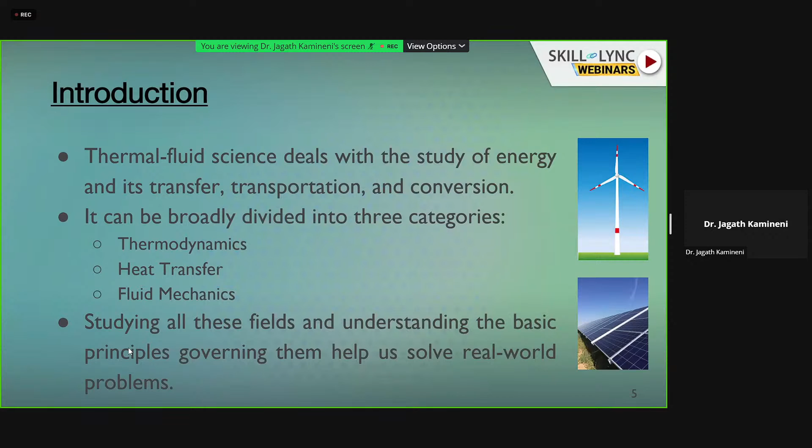So moving further, this thermal fluid science is actually built up with these substreams, which we call fluid mechanics, thermodynamics, and heat transfer. So without taking much time, let me split and introduce one by one.

Thermodynamics is when we study the science of energy, and it converts to work or heat, or vice versa. Things like IC engines, phase changes of fluids, and so on, these are not limited, it's a lot more. Coming to heat transfer, where we study the transfer of energy, not the conversion of energy, in both materials and fluids.

Think about processes like convection and conduction, and a practical example is heat transfer from a flame into some water in a pot in order to boil it. This is a simple example to understand how energy is transferred, not converted. We'll talk in much more detail in the slides.

When it comes to fluid mechanics, we study the mechanics of fluids, both in motion and at rest. If the fluid is in motion, we call it dynamics of the fluid, and if at rest, statics of the fluid. Whatever the category or subcategory, we study how this functions, and in detail it includes linear and non-linear behavior to understand fluid behavior. As an example, think of buoyant forces on an object in water, such as an iceberg.

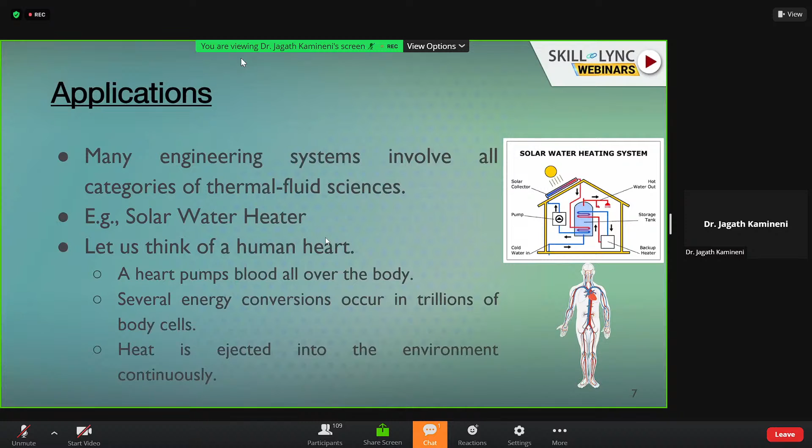So if you understand these kinds of principles, you can study the problems and get the solutions, or the precautions that need to be taken to avoid these kinds of problems. This is where we study fluid flow, the dynamic nature of the flow, and the effects of viscosity also. We may get a chance to learn about the pumping system. So this is a kind of application we can think of.

Moving on to other applications. Another good example is designing the radiator of a car, which involves determining the amount of energy from knowledge of the properties of the coolant using thermodynamics. Then the determination of the size and shape of the inner tubes, the flow of the fluid, and the outer fins depends on heat transfer. The size and shape of the inner tubes and outer fins will be designed based on heat transfer concepts.

And the determination of the size and type of water pump to be used will be decided by the basic principles of fluid mechanics, the concepts applied to find out what size and type of water pump needs to be incorporated in this particular application. So of course,

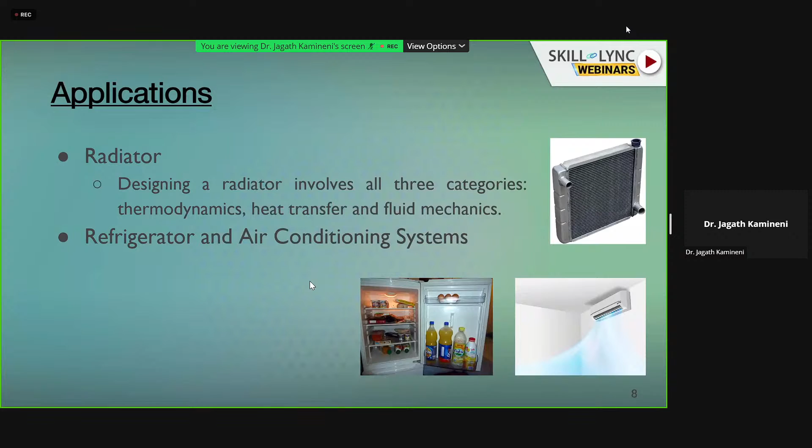Another such application is thermal management of electronics. Maybe we'll talk about this because it is an emerging area where we can use thermal fluid sciences rapidly, in batteries, laptops, and so on. Maybe we'll talk about that also in the research areas, where researchers and scientists are trying to invent new principles or approaches for how to utilize thermal fluid sciences in particular fields.

And another application, such kind of applications, you can just explore the science beyond the Earth's atmosphere. So you can think of the study of fire and combustion in, let's say, a gravity-free environment, which eliminates the confounding factors of buoyancy and flows, allowing us to better understand the underlying physics of fire dynamics. In such systems, with these thermal fluid sciences, you can also see how to analyze material flammability or fire safety on Earth. All these things will also be a very good area of research.

So there is research in other areas of fire science, such as conduction and explosion of fires in both larger areas and confined areas. So there are opportunities such as the development of state-of-the-art combustion models or mesh-free simulation techniques. These are some of the numerical techniques which can be used to solve real-time problems, where you can think of applying these principles to get energy efficient systems or buildings. So this is the motto of understanding these thermal fluid sciences.

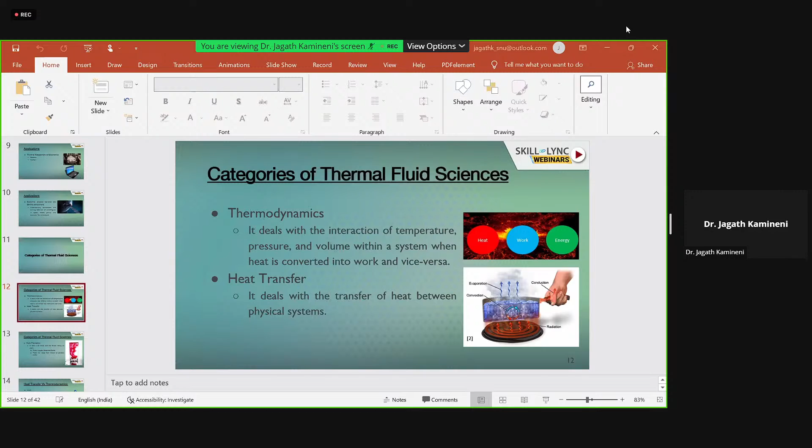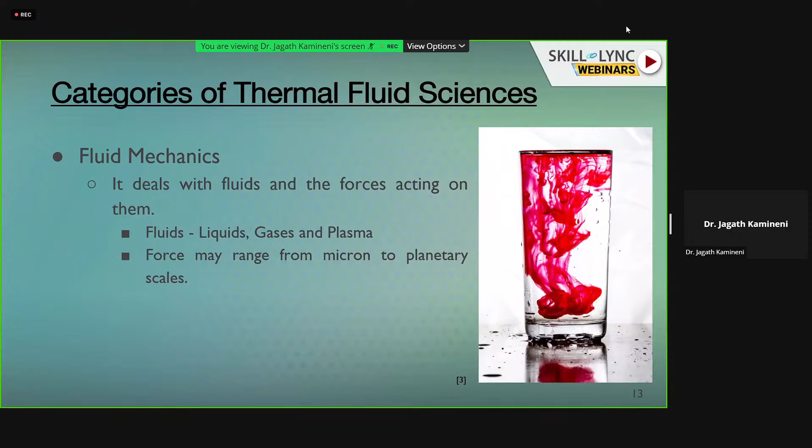Advances in computational science also evolved rapidly and have facilitated effective implementation of numerical methods in this particular field, in modern disciplines such as CFD, computational fluid dynamics. So these are the subcategories of thermal fluid sciences. Moving on, why is this so different from heat transfer and thermodynamics?

So we'll take one definition, and we don't have much time. I think it's only because of so many distractions.

It's okay. Anyways, I'll quickly go through some of the basic definitions which you might have already learned in the past. I'll not take much time, but I'll trigger some consciousness on these concepts. Let me start with the definition of heat. It is a form of energy that can be transferred from one system to the other system due to temperature differences. Everyone knows this definition. It's not new, but it helps to understand both thermodynamics and heat transfer.

If you look in depth, thermodynamics is about how much heat is transferred, how much work is done, and what the final state of the system is. Whereas heat transfer tells us how heat is transferred. It is not telling us how much heat is transferred, but how heat is transferred and at what rate heat is transferred, and also the temperature distributions inside the system. That is the difference you can make out from the basic definitions.

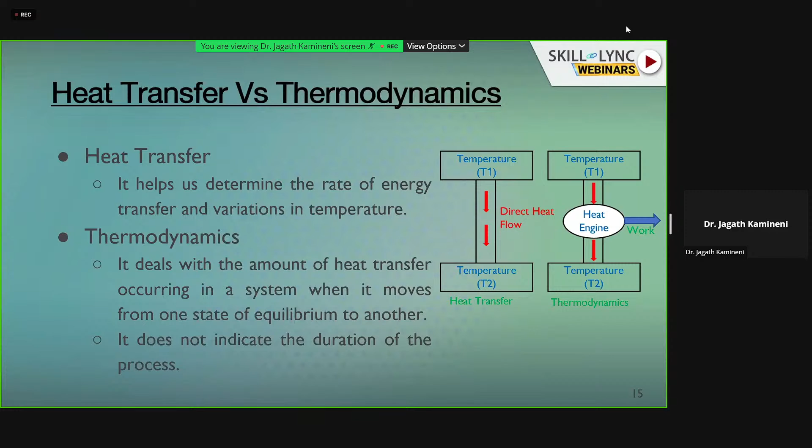In engineering problems, we are often interested in the rate of heat transfer, which is the topic of the science of heat transfer. So that is the kind of study you can think of, and this is the difference we already discussed. Then let's look at basic definitions. Energy is the ability to cause a change. Energy can be converted from one form to the other form, as we already discussed. However, the total energy remains constant. That is the rule: energy can neither be created nor destroyed. That is the basic idea.

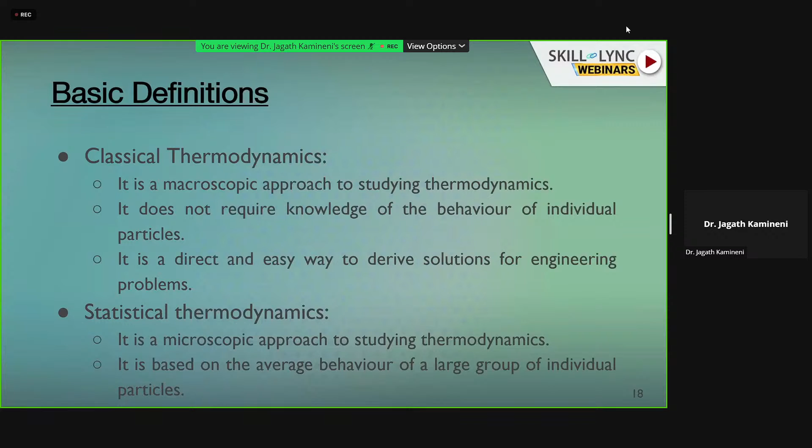So there are different kinds of thermodynamics. These are basic definitions. Classical thermodynamics, where we see only a macroscopic approach, and statistical thermodynamics, where we see a microscopic approach. Maybe we'll see some of the laws, where we understand what kind of thermodynamic systems we use in a general sense.

So this zeroth law says if two systems are in thermal equilibrium with a third one, the two systems themselves are in thermal equilibrium. So that is the zeroth law. We'll just see it briefly.

And the first law deals with principles of conservation of energy. We already discussed it, right? With the first law, we may not expect these kinds of conversions. Complete conversions may not be possible, but you can deal with these kinds of principles. The internal energy of the system equals the difference between the heat transferred into the system and the work done by the system.

So let's assume one machine is continuously evolving some kind of heat. Just take the human body. That is the best example to illustrate the first law. What is the difference between the heat transferred into the system and the work done by the system? That is the quantity which says what the internal energy of the system is.

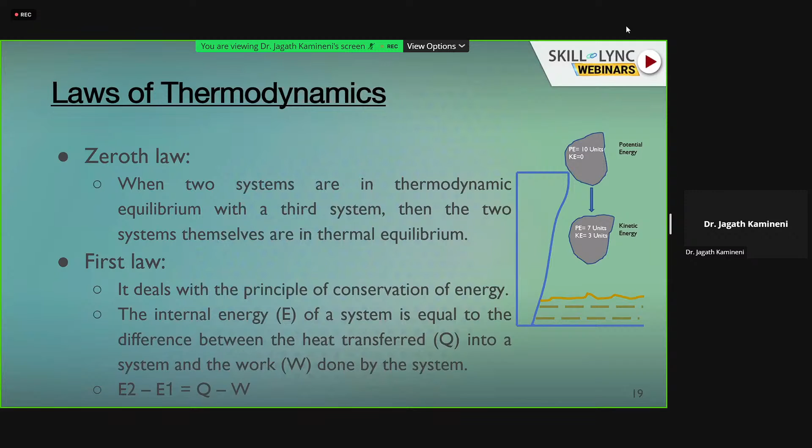And coming to the second law, the entropy of the entire universe will increase over time. So it will be a never-ending process.

And the third law says absolute zero temperature is unattainable, because you may not be able to maintain such systems, or you may not be able to create that kind of system in an equilibrium position to maintain it at zero temperature.

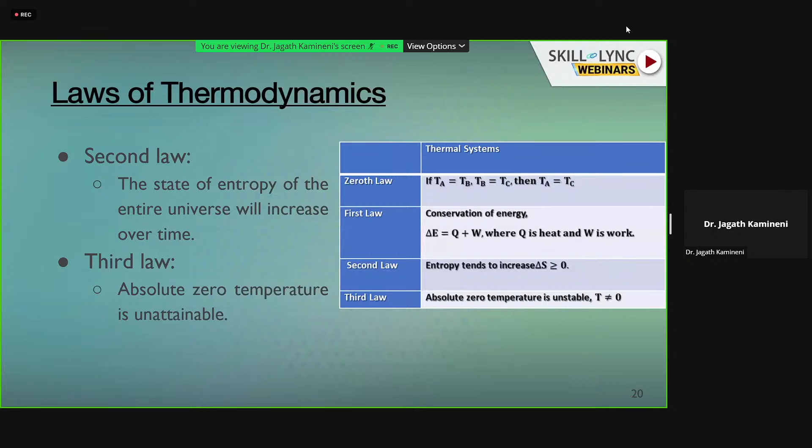That is not possible. So when it comes to problem solving techniques, you can imagine the analytical approach, experimental approach, and numerical approach. Any kind of engineering problem, whether it is a structural problem, a computational fluid dynamics problem, a heat transfer problem, a fluid flow problem, or a combination of all these, can be solved by the analytical, experimental, or numerical approach. These are the different approaches.

In the analytical approach, you have to establish an equation, whether it is a differential equation or whatever form. The physical system needs to be defined in a mathematical form. That mathematical equation needs to be solved by taking the inputs to give a solution. So you can think of that kind of system.

But in real life, not all problems are basic-level problems, and complex problems will not be solved by analytical expressions. Just think of a circle, x squared plus y squared equals r squared. You cannot solve a bigger problem, like an aerofoil problem, by boiling it down to a simple equation. The only approaches you can think of for complex problems are the experimental approach or the numerical approach.

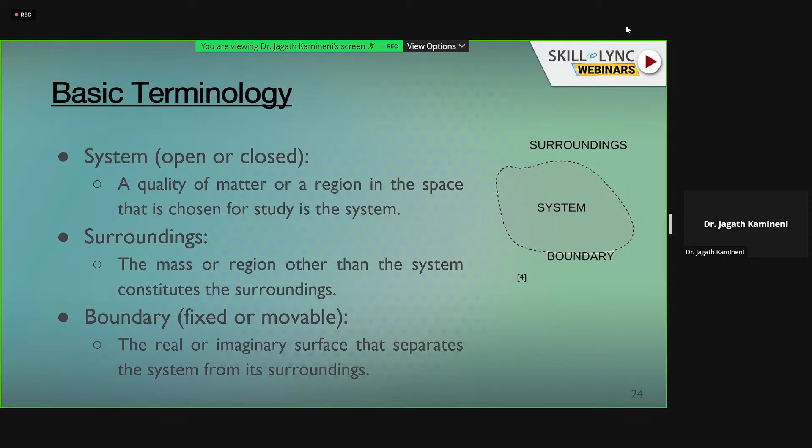And there are some basic terminologies, dimensions, units, where the physical quantity can be characterized and the magnitudes assigned to the dimensions, which are called units and dimensions. And these are the basic terminologies, open and closed systems. Maybe I'll just skip some of the content.

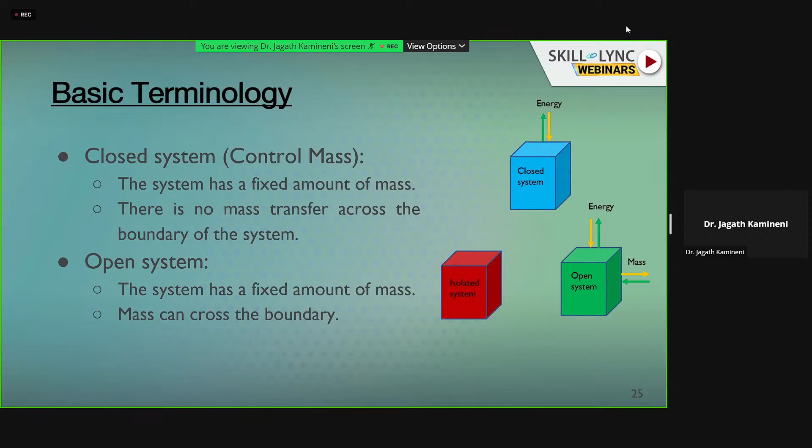Basic terminology, closed system, open system, where I'll just explain only one point about closed and open systems. Energy and mass are both transferred from the system to the surroundings. Energy plus mass, then it is called an open system. If only energy is transferring, we call that a closed system, and where nothing is happening, that is termed an isolated system.

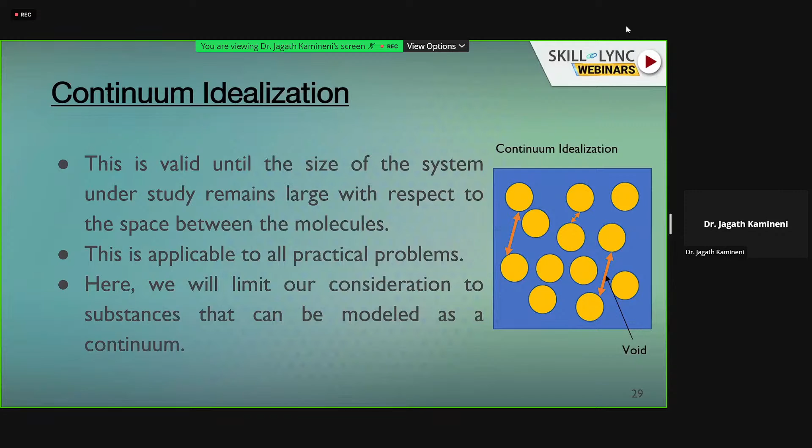So this continuum idealization, I'll just state in one word: these are kinds of assumptions. Let's assume you take a rock or any object, where you cannot expect each and every atom to be connected with the other atom. So there will definitely be voids. If you are considering a macro scale level, those voids should not be considered, and the whole system is continuous. And if you are working on a micro scale level, then you have to consider these voids also to understand the physical behavior of any system. So that is a kind of assumption, or a base to start with any kind of problem.

And this is also the equilibrium state. If you are not considering the state of equilibrium, if a system is not in equilibrium, you cannot solve any kind of problem. That is a basic rule. Any system, any object, any problem in thermal fluid sciences particularly, you have to say that this system is in equilibrium. If you are going for any kind of dynamic problem, where it is changing rapidly from time to time, then you increase the complexity of the problem. So that is an interesting area to learn a lot more, rather than going for only static problems where the equilibrium state is considered.

There are no unbalanced potentials or driving forces within the system. So that is the kind of system you can think of. What kinds of equilibrium are there? Thermal, temperature; mechanical, where the pressure at any point in the system should be equal; phase equilibrium. So what is that? With two phases, the mass of each phase reaches an equilibrium level.

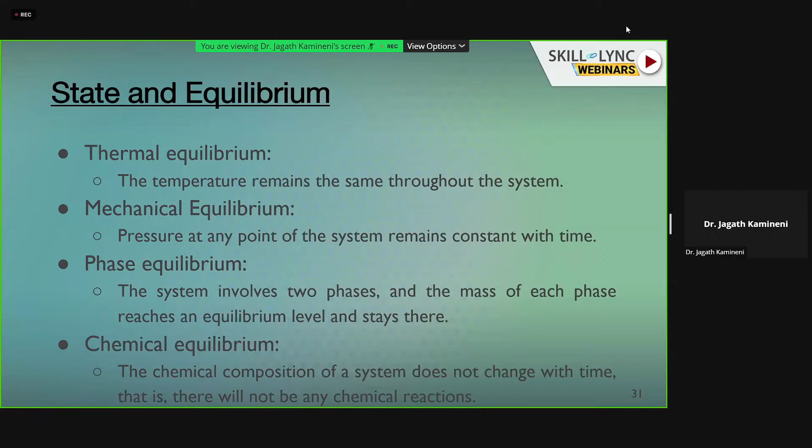What is a chemical equilibrium? The chemical composition of the system does not change with time, because there is no net involvement in the chemical reaction. Even if you are adding so much composition to the system, there is no change in the system. This kind of equilibrium position helps to solve many kinds of problems.

This is also one of the examples, and we may skip this process.

So we'll come to fluid mechanics. Just think about what is a fluid. It starts with the fluid, which is just a substance in the liquid or gas phase. And I think we have already discussed the statics and dynamics of the system.

Coming to fluid mechanics, it is the study of interaction of fluids with solids, or with other fluids, at the boundaries. If you are facing these kinds of problems in engineering streams, you can go to fluid mechanics and read out the basic principles and how to solve the problem. This is the kind of idea to implement.

So one of the wonderful photographs they have pasted here - this is a wonderful simulation where you can think of fluid flow. It is not only in the automobile industry; lots and lots of industries are using this particular numerical approach to solve problems, which may involve all these things, not only fluid mechanics. It also involves heat transfer or energy transfer, which might happen during the motion of these objects. That is the kind of study you can think of.

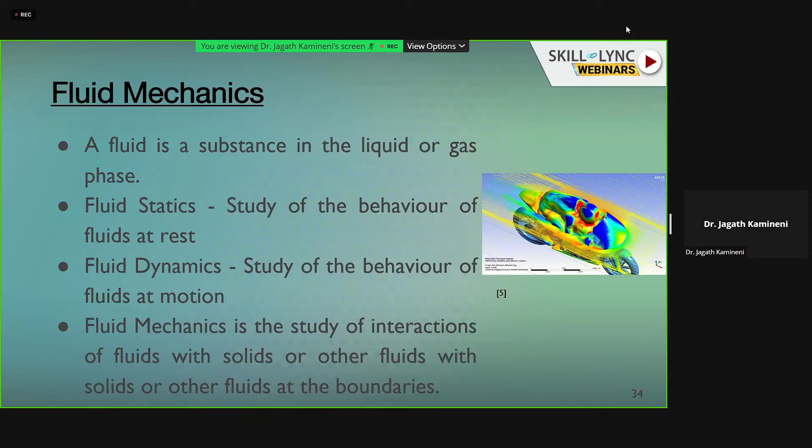So what is the difference between solid mechanics and fluid mechanics? I can give one example in one line: a solid can resist the applied shear stress by deforming, whereas a fluid deforms continuously under the influence of shear stress. That is the major difference.

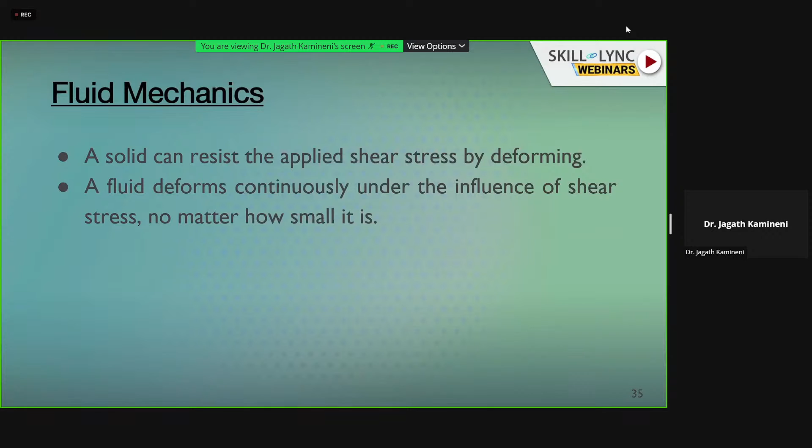Shear stress is a lot to study in fluid mechanics, no matter how small it is - whether you are working on a micro level system or a macro level system, or maybe a larger scale system, or aerospace, or spacecraft at the end. You have to handle such kinds of stresses which may affect the systems a lot, and ultimately give bad results or inefficient systems.

Now, if you talk about research areas, there are various research areas. Thermodynamics is a dynamic field of research and development, applicable to almost all engineering applications, or energy generation and implementation, in our energy hungry world, because we are running short of fossil fuels, or non-renewable resources, as some call them. To develop any efficient energy system, you require an understanding of thermal fluid sciences. Whether it is the power industry, fuel cell hydrogen research, or the aerospace industry, developments in thermal fluid science allow the world to grow more sustainably in the use of energy to meet the requirements of growing demands.

Here I have presented some of the interesting areas: development of energy efficient systems, where we talked about all these streams, and cooling techniques for electronic devices.

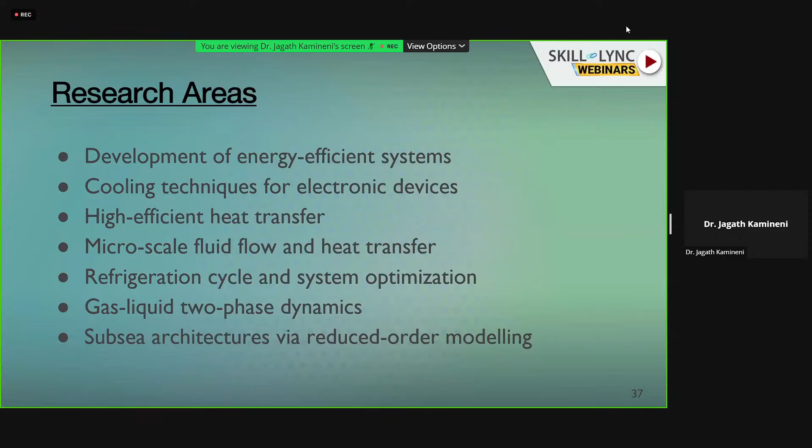Another interesting area to research is developing efficient fuel technology. A challenging task here is analyzing COPV, a new term for many of you. COPV is a composite overwrapped pressure vessel surrounded by extreme thermal effects, used in automobile applications. There's a company called Faurecia very interested in developing research in this area, analyzing the fluid flow behavior of hydrogen inside the COPV tank. Understanding these physical systems is a very interesting area of research, where thermal effects can explain the behavior of COPV and how fluid behaves within the tank filled with hydrogen fuel.

You might have heard about this news recently. NASA achieved another milestone in human history when its spacecraft, the Parker Solar Probe, managed to make contact with the sun's upper atmosphere. It not only managed to survive such extreme heat conditions but also managed the energy conversion. This is not a simple problem to solve; thousands of scientists and engineers and many more people are involved in solving these problems.